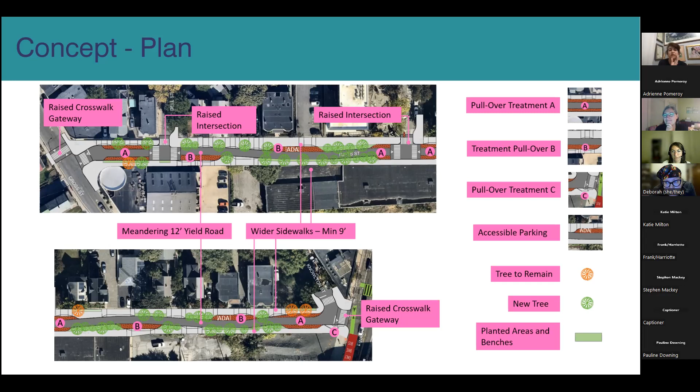Where would a bike lane be - oh, there won't be one, that's right, because it's a neighborhood street, okay. Correct. And in many areas, which is the beauty of narrowing the roadway, we will have much more space - we might in some cases have up to 19 feet of sidewalk width, if we're lucky.

And I think, Holly, you know my feelings on anything raised, how highly dangerous they are, especially when you're a white cane user and you can't find an edge. Harriet or Pauline might want to add to that conversation.

But meandering means the street meanders, right, not the sidewalk - there's still a straight line? Yeah, obviously the sidewalk is straight along the property line, but because of the width of the sidewalk changing, it will have a meandering or curvy curb line. Sometimes it will be the 9-foot minimum we described, and in some cases it might go all the way to 19 feet.

I just like, this is Harriet, I just like to make one last comment about the raised crosswalks.

For example, if I were living in that neighborhood, I would arc my cane tip so that I would find the curb, if I'm going down Tufts Street toward Washington Street. I would slide my cane, arc it around till I could find the actual curb, and then slide it back to feel the raised sidewalk, because then I would be clearer that I might actually be on the crosswalk. Unless my suggestion is taken that we use more of the textural safety panels in the direction of travel, with a short span without panels, and then right as you step into the street, one more row of panels. That's just my personal experience with that.

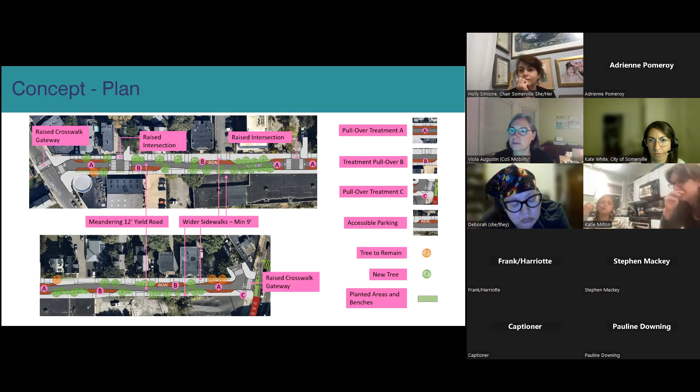So I'm hoping that we can achieve some tactile way that you don't have to go, that you can use the raised crosswalks and feel safe along them. Thank you. I'm happy to be a resource.

Okay, I'm going to go to the next slide, and we can always go back to this one. I wanted to mention those pullovers, or describe a little bit the pullovers I've already mentioned. Those are the areas where cars can move out of the way to let an oncoming fire truck or other car pass.

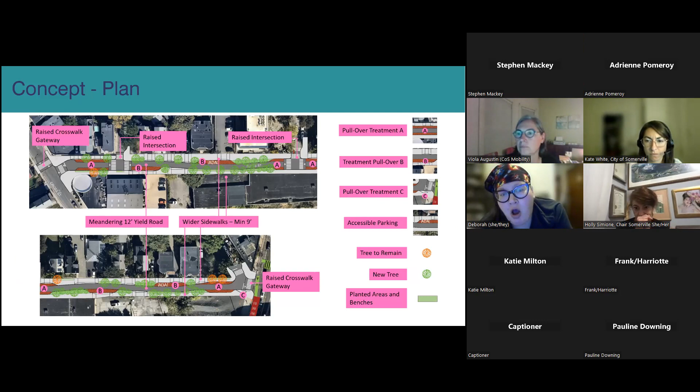I actually had a question back on the previous slide, which is when you're designating trees to remove, are you taking a look at roots that are disruptive to the sidewalk? I know that's one of the real problems, when you have those roots making it bumpy for mobility concerns. Yeah, and there are lots of them on Tufts Street, as anybody who has walked it knows.

Yes, so this is a project that will fully reconstruct the sidewalk. All existing concrete will be removed, and the subgrade too, so yes, all the roots should be removed. And that is further reason to remove some of the old trees and add new trees, because we're hoping to have more space for a planting bed. The chance of uprooting should be drastically reduced.

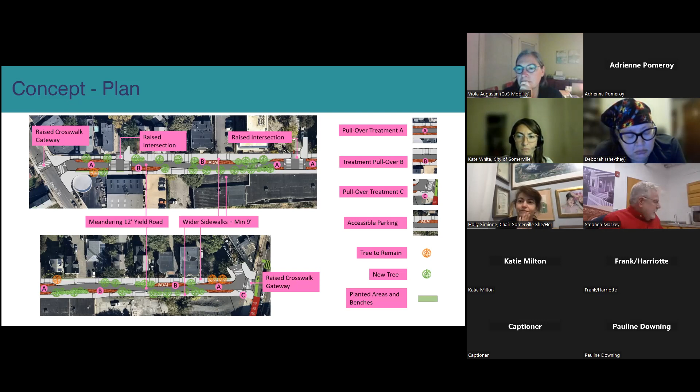I believe the automobile in a lot of ways ruined cities in America and the world, and we have to take that back. The streets are kind of a public commons, and everybody should have access to, enjoyment of, and safety on the local streets. This re-examination of how streets are used in the most densely populated city in New England is very important, and a key part of that is what the Disabilities Commission brings to the dialogue.

I hope along the way businesses can be part of the dialogue, but I have a couple of questions. Who is the ultimate decision maker on these designs, whatever they are? Who ultimately makes the decision? Are any decision makers on this call? By virtue of us talking to them, yes, definitely. Who are the decision makers?

So ultimately the staff will decide what will be designed, yes. Will the staff have to bring this to the Traffic Commission? I don't know, Stephen - so it's Brian Postlethwaite and Brad Rawson who ultimately decide on this Tufts plan? We collectively as staff, including DPW and the fire chief. The DPW and fire chief are represented on the Traffic Commission, correct? I believe if you check, ultimately you're going to have to bring this before the Traffic Commission. I do not know the full process on that.

I think one thing that should be determined is who ultimately is the decision maker on this, and I don't think you ought to do another thing to amend or to keep what you have so far before you can answer that question publicly. Who is the decision maker on this? Number two is, when will there be a public hearing before the decision maker, whether it's Traffic Commission or you and Brian and Brad? When's the public hearing? When does everybody get an equal chance?

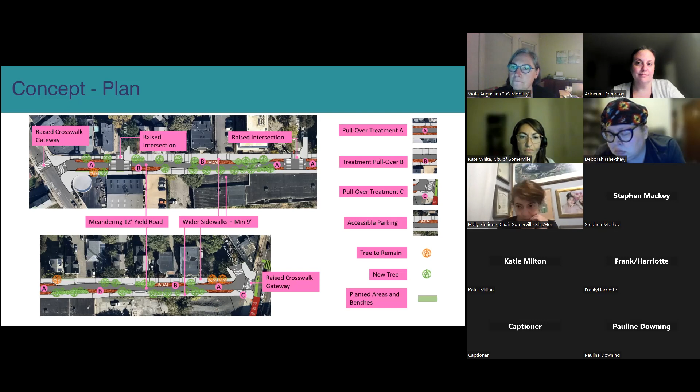Thank you, Stephen. This is Holly again. I also grew up in Winter Hill, corner of Oakland Ave and School, and I still live here. There's no more riding big wheels up and down the street or playing stickball, which I surely miss. And there certainly weren't as many cars as we have now.

I really appreciate that you're here contributing to the meeting and providing feedback. But I think we have to pivot and look at a few more of the slides and your input on those designs. I hear what you're saying on a broader level, and I know mobility will address that. Myself and other members also have similar interests. Would it be okay if we move forward? Would you stay on with us and still provide additional feedback?

Sure, I'd be happy to. Thank you, Holly. Thank you very much.

Through the chair, just a point of education on logistics. Stephen, just to let you know, Brian Postlethwaite couldn't be here this evening. He may join, but he's the mayor's appointee to this commission as well, for the very reasons you state, so that this commission has expertise in engineering and other things in order to have a seat at the table with design and decisions. My colleagues from Mobility, Viola and Kate, quite often coordinate with this commission on these things. I just wanted to note that.

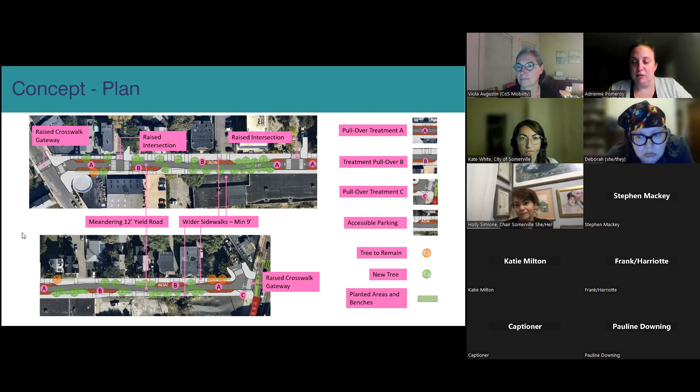And Brian actually just joined us, so I feel like I just manifested that.

Can you tell me how much more of the presentation we have? I want to make sure we get through your slides. There are only 2 or 3 slides left. Okay, I don't want to push you, but unless anyone else has comments or questions on the slides, if we go through the rest, we can circle back to questions, comments, commissioners, and public, making sure everyone has a moment to speak.

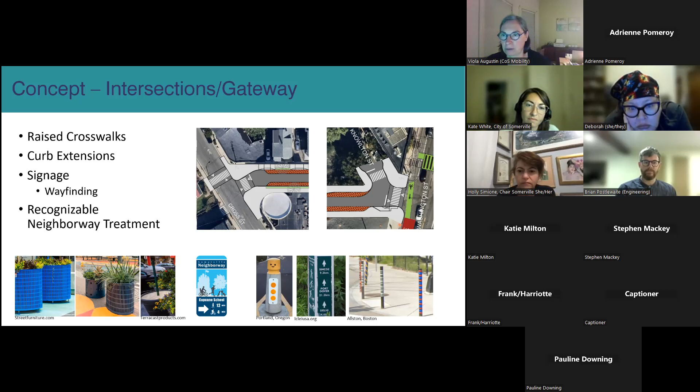On these larger curb extensions, we might have to allow the fire truck to mount the curb a little bit, so we sometimes want to put bollards in there. You see that currently at the intersection of Gilman and Oliver, with bollards protecting pedestrians from cars that might have to go onto the sidewalk, the emergency cars. At Gilman and Oliver, those bollards are just silver, utilitarian bollards.

We could have fun with those bollards. The Lego that Katie was talking about is one example - the 3 dots are actually light reflection, so they have a function, but the way you put it together looks like a Lego. You could also cover the bollards and use them as wayfinding, or just be creative. There's one image where skinnier bollards have tape around them, in Allston, Boston, an intersection where the neighborhood just took over and overnight created these colorful bollards.

So that's the intersection slide. And then this is the next slide. Holly, sorry, go ahead.

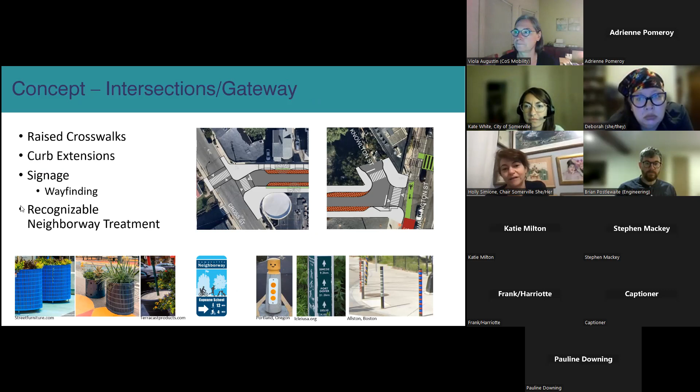If you would go back - I'm always about a nice clear sidewalk, easy crosswalks, wide enough, not too many trees. But I really like the images you're sharing of the variations of the bollards. I like that they're creative, and I like that it adds to the neighborhood. I definitely vote for the Lego one.

I love the one that shows directional information, although it would be great if it also had a way to be audible, kind of like a crosswalk signal. Totally talking outside the world here, but at Cross Street and Tufts, those are really fast driving car spots - are you going to have either signals, or something you push a button on that flashes, so people know to slow down before pedestrians are there? I don't know if you're at that level of feedback, but that would be great feedback to give us.

The current design only has a raised crosswalk on Cross Street, and we already added speed humps before and after to make sure that drivers slow down. Thank you for the comment.

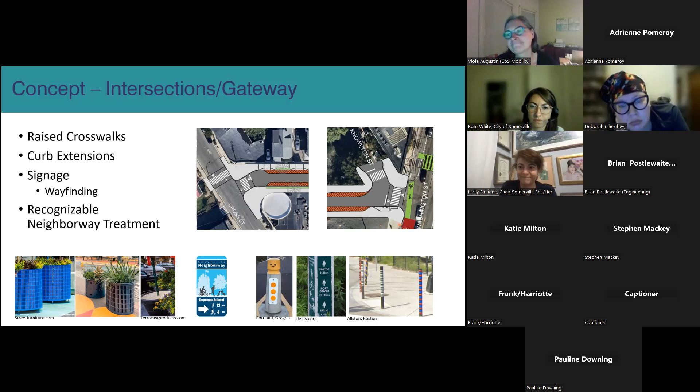So the next slide shows the intersection of Washington and Tufts, where the same gateway treatments I just showed are possible. This slide also overlays the latest iteration we have for the crosswalk that the MBTA is building, along with a wider sidewalk that will hold a protected bike lane, but also a waiting area for a bus stop.

So you come out of Tufts Street, you turn as a pedestrian, and you're only a few feet away from the crosswalk that gets you to the other side. The other side is what we call a shared sidewalk, so both bicycles and pedestrians will share it. It's a wide sidewalk, actually wider than the community path, and it leads you directly to the access to East Somerville Station.

This green line indicates, very vaguely, the movement we're struggling to accommodate for bicyclists. So any feedback you have there is welcome, but the design detail is still to come. And this crosswalk across Washington is activated by a rapid flashing beacon.

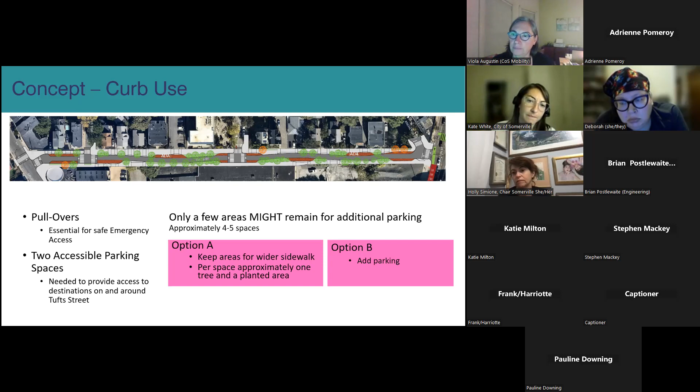Yeah, thank you. This is Holly. I have a side question: those new little tiny rotaries, how do emergency vehicles get around those? Yeah, we've done tests with the fire chief and operators, and so we designed them in particular to allow the emergency route trucks to go through.

And plows, probably be ready for that first plow season. Yeah, the plows were another critical thing, and you see one of the circles being redesigned or shifted a little bit, and that was in particular to accommodate the plows. Thank you.

I'm just going to ask really quick if we have any commissioners who haven't spoken, to share anything that compliments the team on things we really appreciate, and possibly point out areas that could be modified slightly. Pauline, just checking if you wanted to add anything to the conversation, not to obligate you in any way. Or if any of the other members would like to speak.

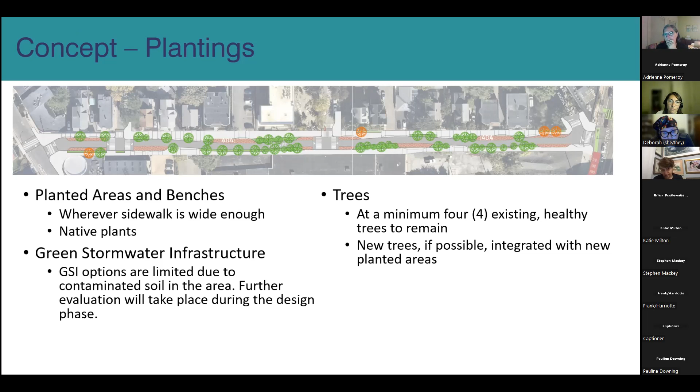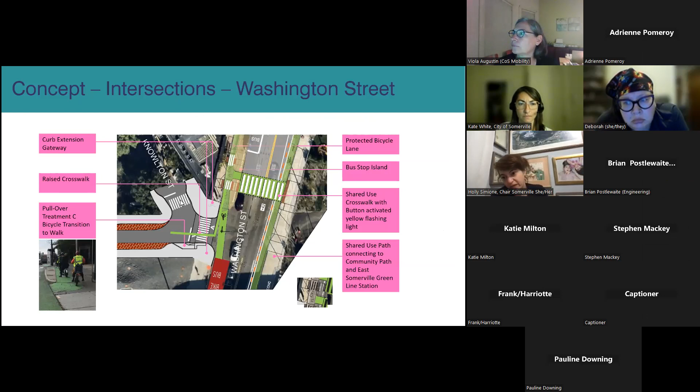I just want to say that we really appreciate you giving us this presentation and the opportunity to ask questions. And also, as I mentioned when this first came up, as residents it's very important that we go through and complete the surveys and give the feedback. And again, if there are members here or anyone in the public who needs help doing that, Adrienne is here for that, as well as any accessibility issues. I will definitely bring this up at our meeting next week, sort of summarize what we've said today, and work toward a letter for your plans.

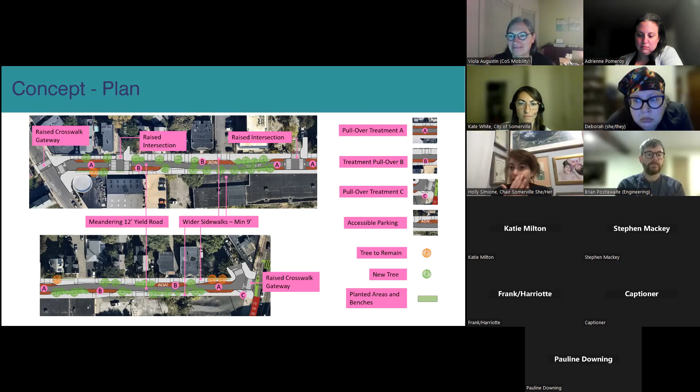And unless anyone else wants to add anything, I would like to open it up again to either Stephen or anyone else who'd like to ask some questions, maybe let Brian acclimate himself to where we are. Thank you, Brian, for coming tonight. I know you had multiple things this evening, and we have had some questions that we're going to ask very politely about how these things go through the cycle from designs to feedback. And I think, I don't want to paraphrase incorrectly, Stephen, so if you'd like to add any questions or give any positive feedback.

Thank you, Holly. I really appreciate you recognizing me, and I thank everybody for taking the time with me. Brian knows, and I think Viola and Kate know, that I have real questions about the process that's been going on for a couple of years. I simply put my question in the chat about when the abutters, residential and business. And I think this is of interest to the Disability Commission and everybody else as well, if you take a look at that question.

It's interesting, Stephen, when you brought up the feedback from the businesses that are along these routes. That gave me another perspective or shift that I haven't thought of. I appreciate you sharing that with us tonight.

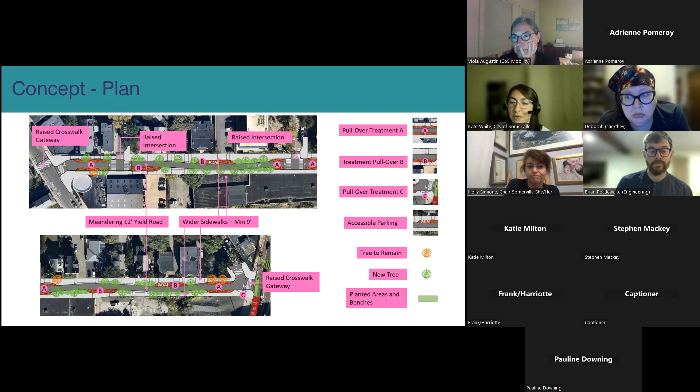This is Kate. I'd just like to add that we really appreciate the time this evening. We really encourage folks to come to the variety of opportunities. We're really trying to talk a lot to neighbors, nearby businesses, community groups, and teens who use this route to get to the high school. We've really gotten to know the neighbors along the street and have spent time sitting in front yards talking through these items. So we really encourage folks to come, whether it's through virtual opportunities, in person, or talking one-on-one with Viola and I, if it's while you wait to pick up your kid outside the school.

In addition, we have been talking to the businesses along the street, which are a few, it is primarily residential, not only on opportunities for the street redesign, but also connecting to resources through our small business division in economic development. Viola and I are always open to questions or opportunities. Our next opportunity for our public meeting is in the springtime, where we're excited to pull everything we've heard together and present the final design and gather feedback. So there's lots of opportunities to engage.

Thank you. Anyone else would like to speak? I just had another question for mobility, if anyone else wants to add before we hit our last few minutes.

I always like to put out to guests and people who come to present and share with us the same question: what can we do to help you? There's that whole push-pull. You give things to us, but how do we reciprocate back other than giving you feedback in a setting like this? I'm kind of putting you on the spot, but if there's something you want to share, or if you think later on of something that would be helpful, how we can help with your projects.

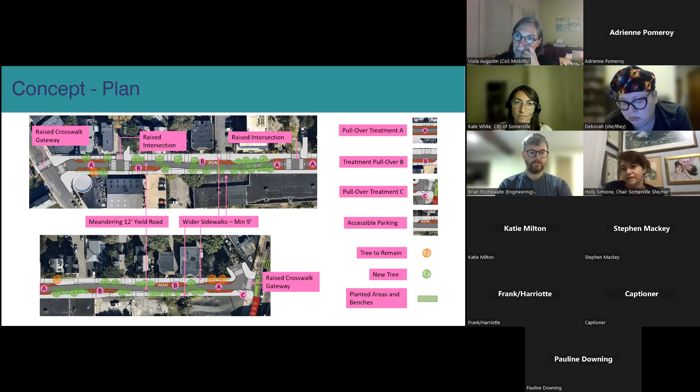Yeah, I'm sure we can arrange something like that. Thank you for raising that, Holly. I appreciate it very much.

Okay, it's 7:58. We've never been on time. We're not going to end early. Well, we could, a minute early anyway.

Brian, anything you'd like to add? Unless there's any outstanding questions, I don't have anything to add. As always, Viola and Kate do a wonderful presentation.

Brian, I do have a question. Is Stephen correct in that the Traffic Commission is the final decision maker on whether this project goes or doesn't go?

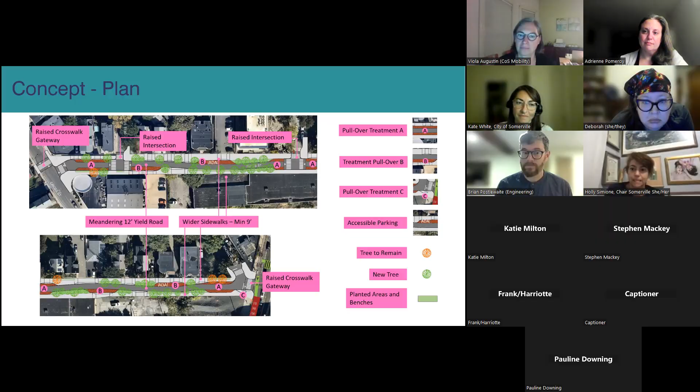It is much more complicated than saying there's a final decision maker on anything. Street reconstruction is a very complicated element that requires input from probably a dozen different departments in the city. Each department has to be coordinated with and consulted. The Traffic Commission is one of those elements. The Traffic Commission has specific roles and responsibilities around specific items with the street, but so does engineering, so does DPW, so does mobility, etc. So the Traffic Commission isn't a final decision maker, but it is one of the decision makers.

Who is the final decision maker? The city of Somerville as an organization. There's not... Steve, I think you're speaking to an outdated concept of deciding, of making decisions. These decisions are group decisions.